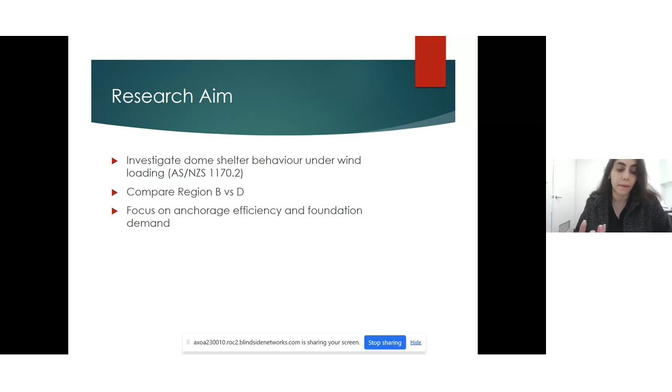Now to the research aim. The aim of this research is to investigate the effects of wind loading on dome shelter systems and their supporting foundations. This includes understanding how structural forces change between moderate and extreme, cyclonic wind, comparing wind regions B and D. The other objective is to evaluate whether inclined anchor systems can provide better performance compared to traditional vertical hold-down bolts by reducing the structural demand and improving the overall stability of the structure.

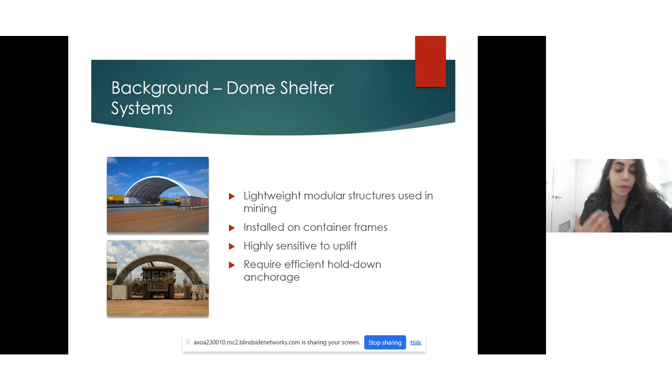To give you a basic understanding, dome shelters are lightweight, modular systems widely used in mining sites. They are easy to transport and use in remote areas, and are often mounted on sea containers, which adds flexibility but also introduces structural challenges because of their low self-weight. Dome shelters are particularly vulnerable to uplift forces caused by wind loads, making anchorage design a critical component of their performance.

According to AS 1170.2, wind loads in Australia are classified into different regions. Region B represents areas with moderate wind conditions, and Region D is cyclonic. The wind pressure in Region D is significantly higher, resulting in much larger uplift forces and overturning moments. These increased forces place greater demand on both the structural system and the foundation design.

When subject to strong wind conditions, especially in cyclonic regions, dome shelters experience high uplift forces that tend to lift the structure, large overturning moments that can destabilize it, and base shear as well, all of which affect the foundation. These combined effects increase the demand on the anchorage system and often lead to heavier and more costly foundation solutions. Therefore, there is a need to develop a more efficient anchorage system that can safely resist the forces I introduced earlier.

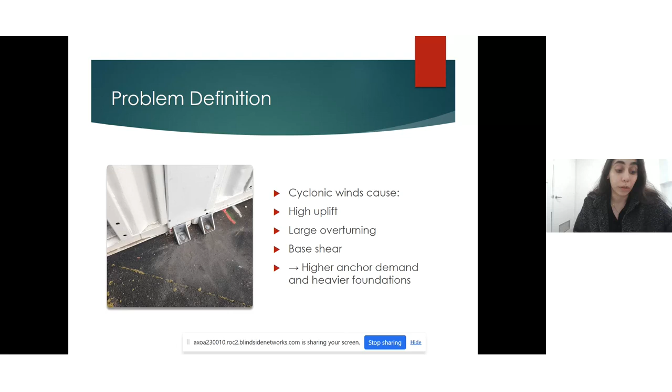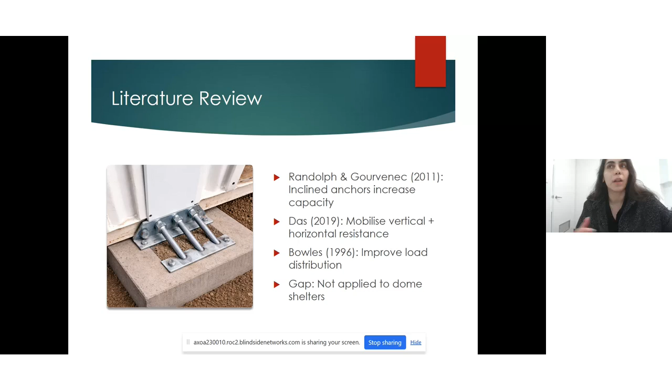I put some references here of geotechnical studies which show that inclined anchors significantly improve the performance of the structure. Research on inclined anchors shows they provide both vertical and horizontal resistance within the soil, leading to increased load capacity and better load distribution. But my point is, these studies have mainly focused on offshore structures or conventional foundations, and their application to dome shelter systems in mining sites has not been explored yet.

Despite the existing research on anchorage systems, there is limited information on the structural behavior of dome shelters, particularly container-mounted ones. Also, very few studies consider extreme wind conditions, such as cyclonic areas in Region D. There is also a lack of integrated analysis combining both structural and geotechnical aspects of inclined anchors in this specific application. This is a clear gap in the literature.

The objectives of this study are to analyze the forces acting on the dome shelter system under both Region B and D wind conditions, to compare the resulting structural responses, and to evaluate the impact on foundation design. The study also aims to assess the efficiency of inclined anchors and compare their performance with traditional vertical anchorage systems.

The methodology begins with calculating the wind loads using the Australian standard AS 1170.2 for both wind regions. Structural models of the dome shelter system are then developed and analyzed to determine key forces such as uplift, base shear, and overturning moments. These are used to design and evaluate different foundation and anchorage configurations, followed by a detailed comparison of their performance.

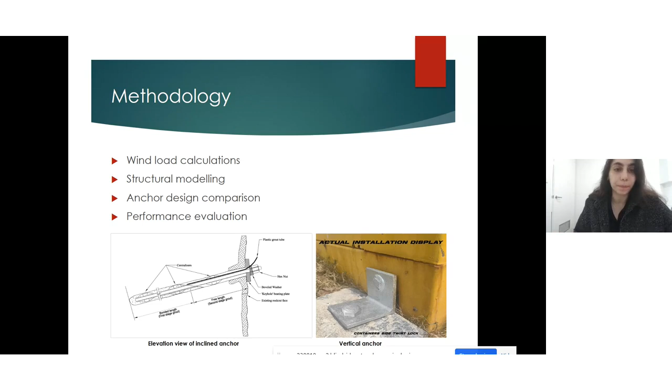In this study, I will compare two identical structure models, created to ensure a consistent basis of comparison. The only variable between the models is the wind loading condition, with one model subject to wind region B and the other subject to wind region D. This approach allows the direct effect of wind intensity on the structural behavior to be closely observed and analyzed.

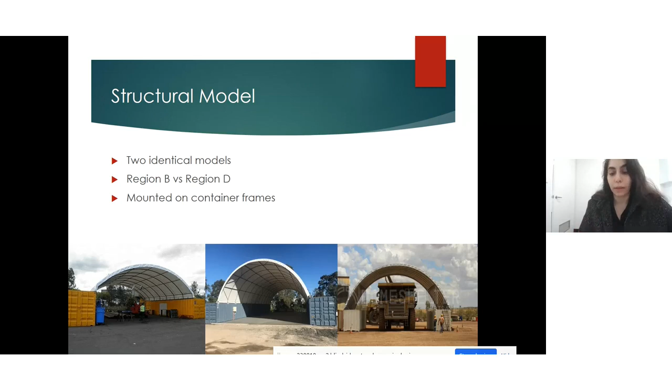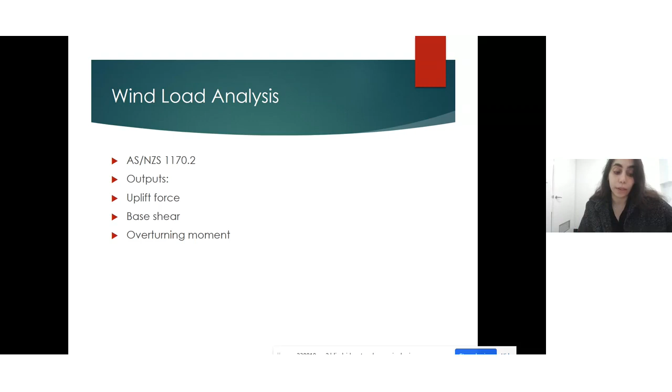Wind load calculations are carried out in accordance with AS 1170.2. Then the analysis focuses on determining the key forces that influence design, including the uplift force that acts on the structure, resulting in lifting the structure, the base shear force that acts horizontally at the base of the support, and the overturning that tends to rotate the structure. These forces form the basis for evaluating structural and foundation performance.

For the foundation analysis, we'll examine how the calculated forces are transferred to the ground. This includes evaluating the base reactions, which represent the force at the foundation level, analyzing the distribution of bearing pressure of the soil, determining the required footing sizes, and assessing the anchorage force. This analysis helps identify how foundation design can be optimized under different wind locations as well.

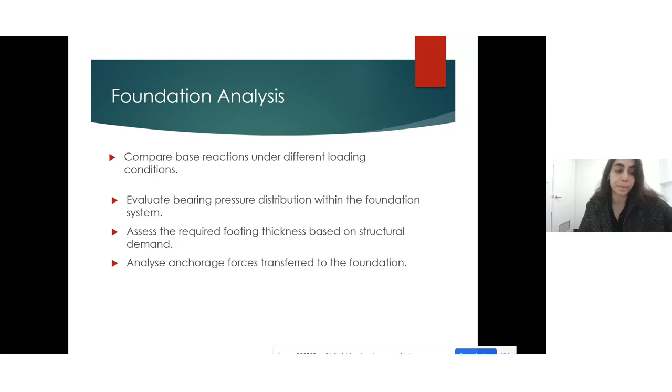The study introduces a novel inclined anchorage system where anchors are installed at an angle of approximately 15 to 30 degrees and oriented toward the edge of the footing. This configuration is expected to improve load transfer efficiency by allowing the anchorage to resist forces in multiple directions, unlike the traditional anchorage, which goes vertically into the soil and the footing and resists just vertical loads.

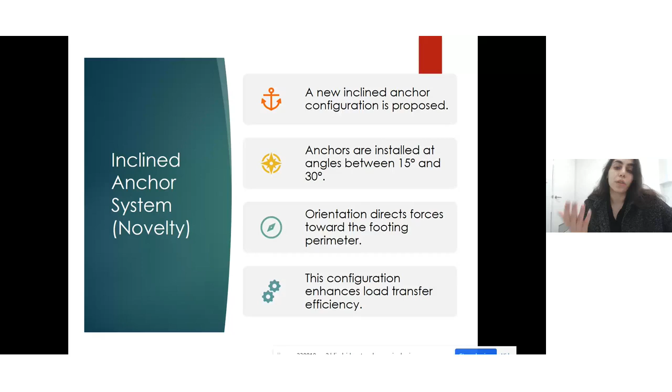The advantage of this system is that it reduces the tensile forces in the anchors, increases the pull-out capacity, and reduces the shear forces acting on the footing. It also improves load transfer through multiple directions of the soil and enhances the distribution of forces within the soil. These benefits contribute to improved overall stability and may allow for smaller and more cost-effective foundation designs.

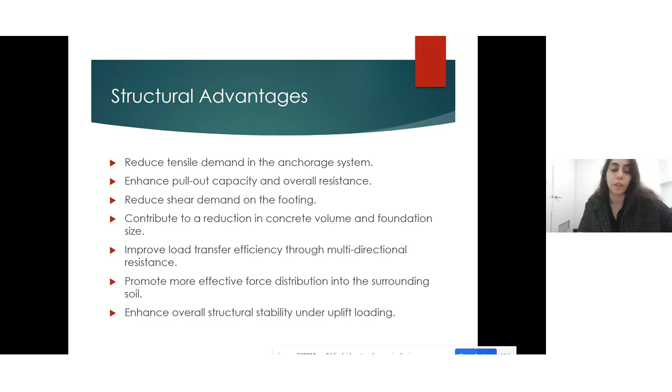At this stage of my research, the literature review and overall research framework have been completed, and work is currently ongoing in terms of wind load calculation and structural modeling, and different anchor configurations are being analyzed to assess their performance, for which I will use the IDEA StatiCa software.

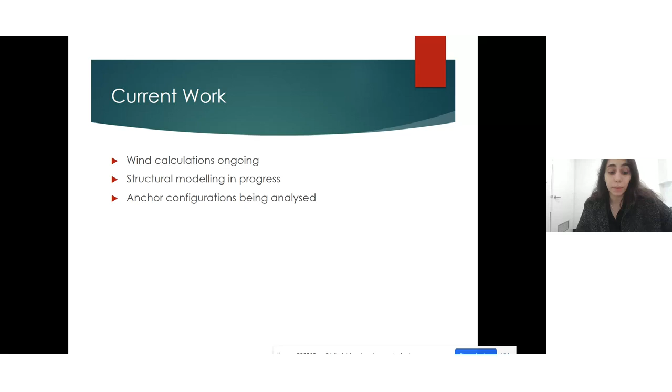The next steps of the research include completing the structural modeling, calculating the base reactions, which I get from the SpaceGass model, and performing the detailed comparison between the dome shelters in two different wind locations. The performance of the inclined anchor system will then be evaluated based on these results to determine its effectiveness.

To conclude, this research aims to improve understanding of how wind conditions affect dome shelter structures and to develop a more efficient anchorage system. The findings are expected to contribute to safer structural design and more economical foundation systems, particularly in regions subject to high wind, called cyclonic wind regions.

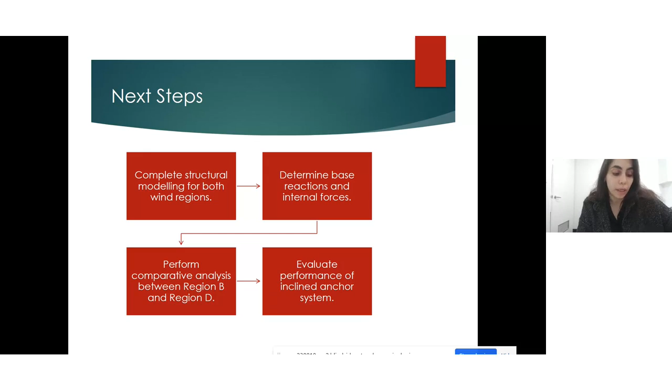Thank you for your attention, and I would be happy now to answer your questions and discuss any aspects of the research in more detail.

I was just coming out of this. Okay, thank you, Mona, for the presentation. Thanks for completing it on time. That was a very good and interesting presentation and topic that you chose. So I will hand it over to Dr. Ahmad for your questions. Thank you. Your presentation. Can you hear me clearly? Yes, we can hear you.

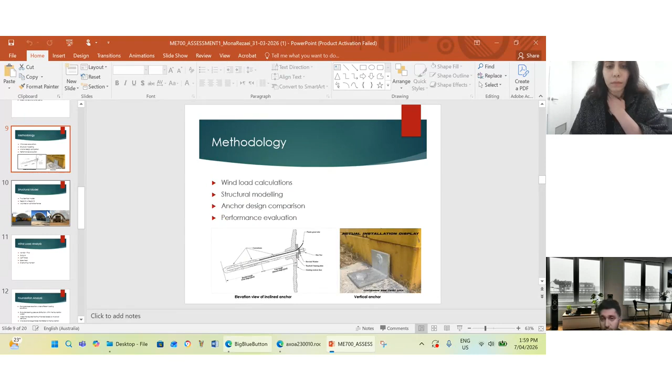Some comments about your presentation mainly: the pictures that you provided are better labeled and referenced. When you're presenting academic work and you bring some pictures, even if you took them yourself, you can just put a label and mention where they are, or if you picked them up from another source, put the sources. So that's one thing. The other comment I have is that the literature review is very brief.

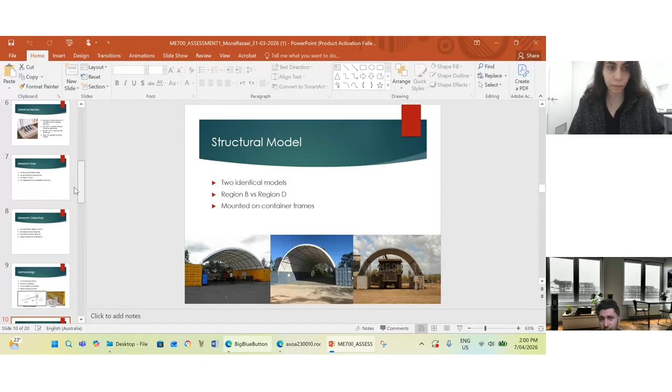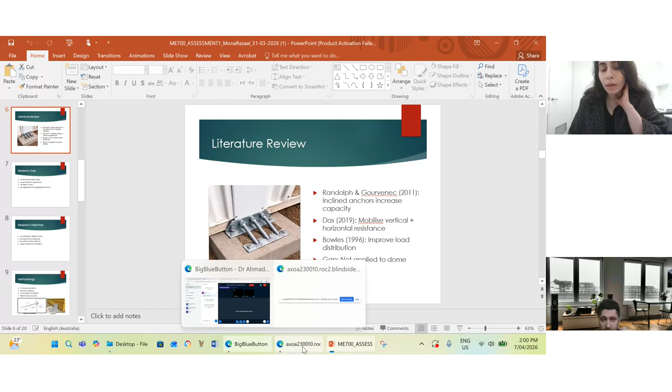So it's good that you mentioned very briefly the few papers, 2 or 3 papers or articles, you name them. It's good to maybe have 1 or 2 sentences about the findings, what they have done, what the outcomes are in their research. If you could have 1 sentence at least. Yeah, I just put it as a note, because I don't want to make a big PowerPoint. Yeah, I understand. You try to make it very abbreviated and short, but it could be better with any picture or graphs. But that's good, not too long. That's fine.

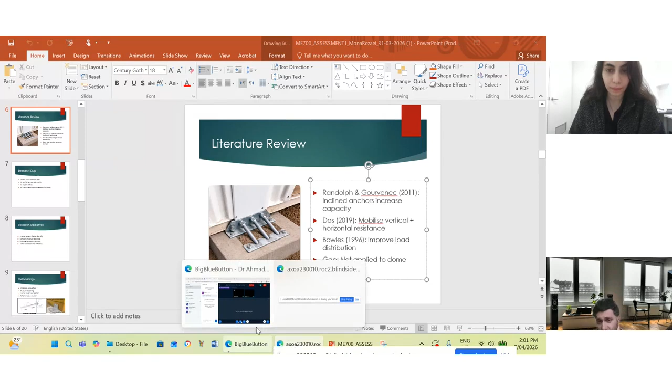Other than that, I don't have any major issue. So it was a good presentation. Thank you. That can probably go to the other assessor, and we might be hearing from the other assessor about their comments, and then you can work and complete your presentation and continue the work as per the advice given to you by myself and the other assessors. Yeah, that was from my side.

Any other questions you have, Mona, or any other comments or advice from your side, Dr. Ahmad? I'm fine. I think after this presentation, I have to start to model my structure and then go through the software basically. Yep, agree, and we can have a discussion on that later on.